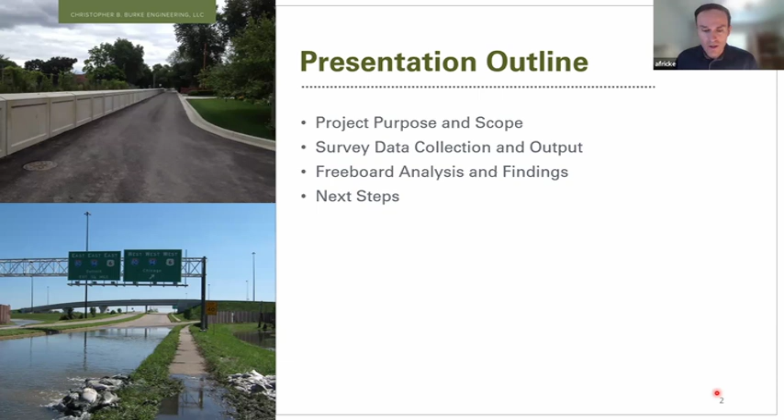First, I would like to discuss the purpose and scope of the project that we're doing for you. Then I will talk about the survey data collection and the information we gathered from that. Following that, I will get into the freeboard analysis and our findings, and then talk about the next steps where we go from here. So first, let's start with the project purpose and scope.

The purpose of our project was to evaluate the levee system freeboard, or the height of the levee, with respect to FEMA requirements. We also wanted to collect data that could be leveraged in the future to apply for a letter of map revision, or LOMR, or continuation of the previous LOMRs with FEMA. As a reminder, a LOMR is a process where FEMA revises the flood insurance rate maps to reflect the benefits of the levee.

It was mentioned earlier in the meeting that previous LOMR efforts that the Basin Commission has initiated have resulted in great benefits for the community west of Cline Avenue. Those communities are no longer subject to the mandatory flood insurance purchase requirements and development restrictions that they must enforce as a participant in the National Flood Insurance Program. The East Reach levees east of Cline Avenue have not received a letter of map revision despite past efforts, but there are ongoing efforts to try to achieve that.

The scope of our work included collecting and processing survey data for 30 plus miles of levee. I'll show you a map on the next slide of exactly where we were working within the system. Then we performed a freeboard evaluation, which was a comparison of the actual levee height to the required height. We've got some graphics to share tonight as well.

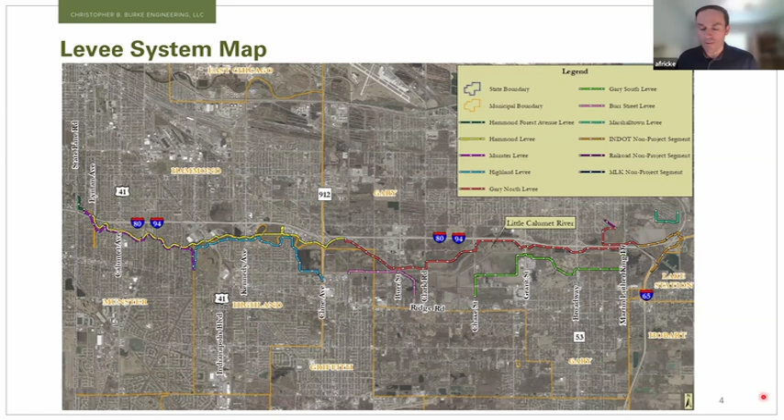Our survey data collection was performed using an unmanned aerial vehicle, or drone, with a LiDAR scanner mounted to it. It collected a dense cloud of points, a bunch of data, which we screened through and extracted elevations from at approximately 100-foot intervals, as well as areas of importance to us at road crossings, at transitions from levee to flood wall, and in other important areas.

The accuracy of our data was really, really good. With the drone, we can get accuracy up to about 1 inch, which is commensurate with and in line with ground survey accuracies as well. So we're able to collect very good data using the drone.

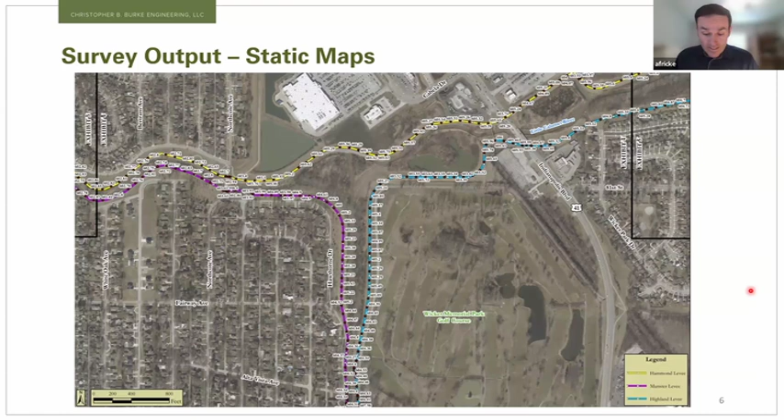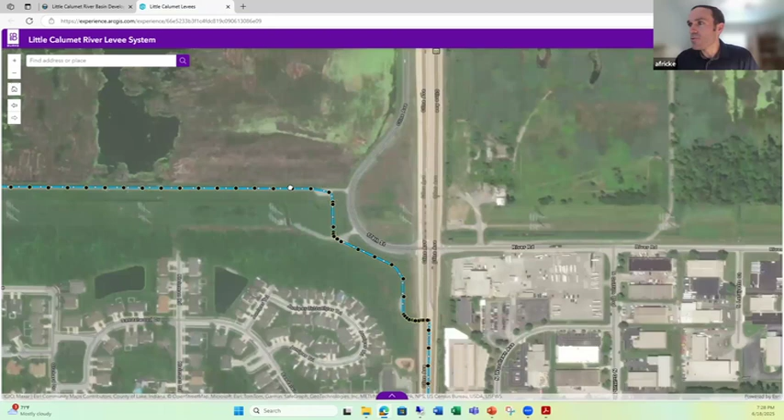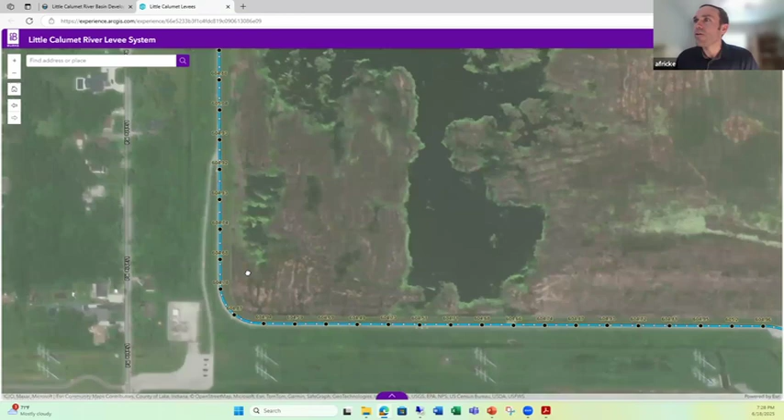I'm going to attempt here to show you our online platform. So this is the online platform, and you can zoom in to any location within the levee system. I've just chosen Cline Avenue as a starting point, but you can peruse and go anywhere in this levee system—scan, pan—and see what the elevation of the crest of the levee is anywhere within the system, all throughout the 30-plus miles from the Indiana-Illinois state line all the way to the interchange.

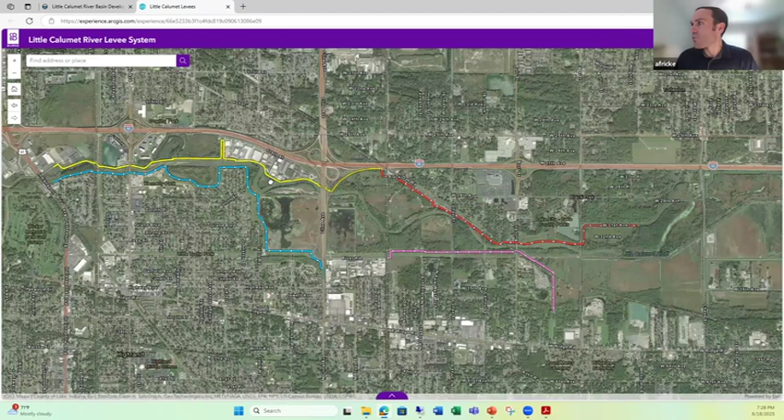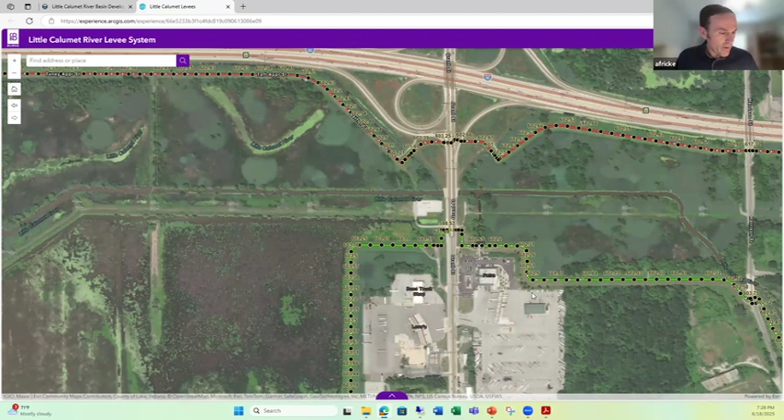I'll just peruse a couple other areas so you can see the amount of data available here. Obviously you have to zoom in to start seeing these points, but this is a very user-friendly platform that anyone with a computer and internet connection can use. We hope this platform is very valuable to you, not only for this assignment but also for the future, having all this data readily available.

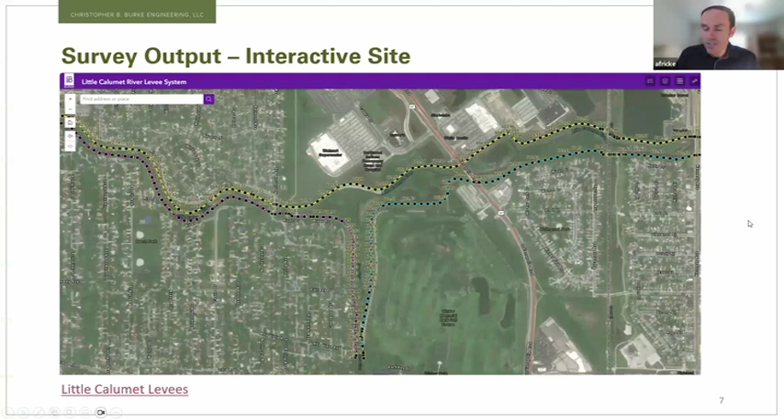Oh, is that cool? Okay, so I'm going to get to the next slide here, back in the presentation.

So we build in freeboard to levees in our designs to account for some of that uncertainty. When we look at the criteria that FEMA looks at for accrediting levees or recognizing them on the flood insurance rate maps, we have to look at the Code of Federal Regulations, specifically 44 CFR 65.10. That's the section of the Code of Federal Regulations that deals with floodplain mapping.

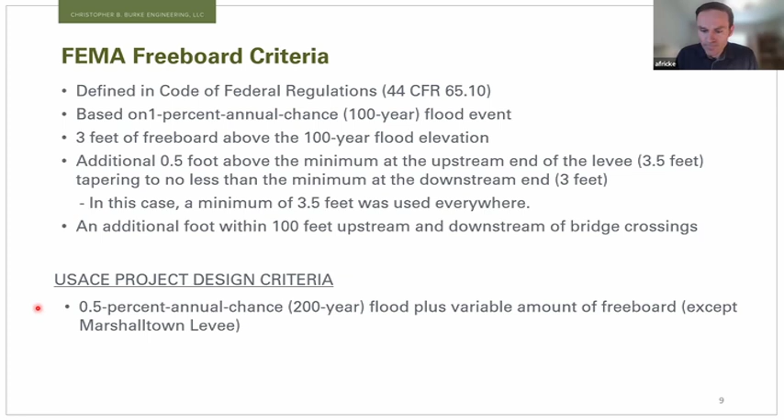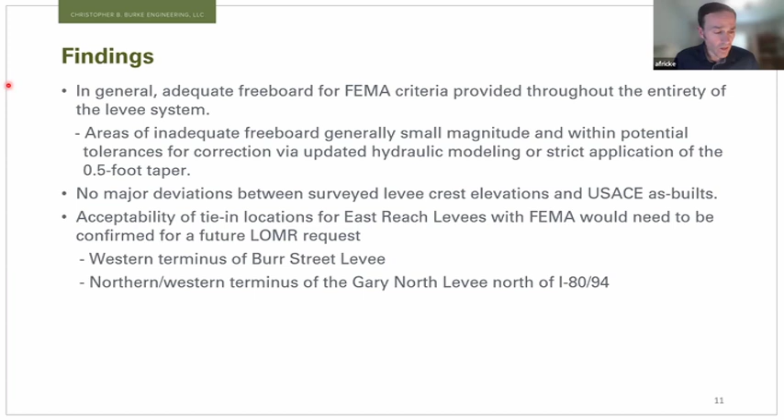I wanted to highlight the western terminus of the Burr Street levee and the northern western terminus of the Gary North levee north of I-80/94. Those are two areas that we'd want to look into in close detail as part of a future LOMR request, just to make sure that those meet all the requirements.

Next steps and conclusions here. This is my last slide, and I'll be glad to open it up to any questions. But we are currently authorized by the commission to perform a two-dimensional hydraulic analysis of Little Calumet River. This will serve as an update to the existing flood elevations. This model is expected to be more accurate than the current flood elevations.

So what we want to do when we're done with that work is to update those freeboard profiles for each levee segment using those new flood elevations. And based on that information, we'll then provide specific recommendations for any improvements that need to be made to address any freeboard deficiencies for the FEMA requirements.

So we're hopeful that the new flood elevations will be at or below the current flood elevations. We're keeping our fingers crossed for that. That would certainly be a good sign, but we'll cross those bridges when they come, and we'll update those profiles when we get there. But overall, good news that the levee system meets the height requirements for FEMA for the vast majority of the system.

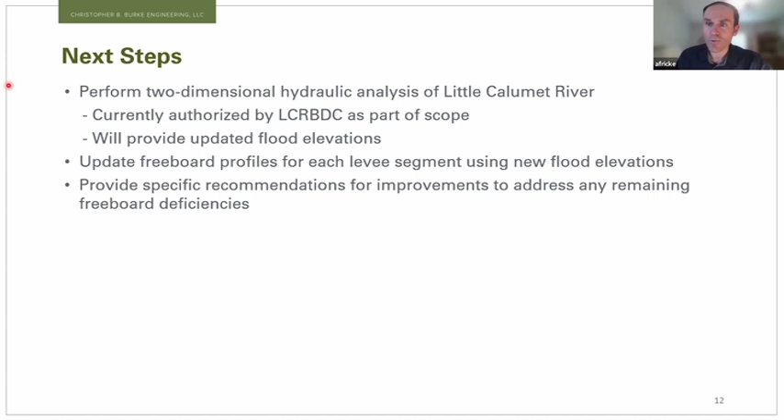So I'm at the end of the presentation now, and would be glad to answer any questions that you might have.

Gentlemen, any questions for this young man? That was a fabulous overview. Thank you very much. Concur, Mr. Chairman, I do have some questions. Thank you. AJ, right? Yes, sir. Okay, good. I have like 4 or 5 questions.

Be glad to answer. First 3 are sort of administrative. One of the first slides you implied a difference between a LOMR and a continuation of an existing LOMR. What's the significance of that?

That's a really good question, and one that really doesn't have a clear answer out there, but I'll try to answer as best as I can. So for projects that have an existing letter of map revision, like the levees that are west of Klein Avenue, we are not familiar with a process whereby FEMA goes back and reevaluates those at a certain time interval to check that they're still meeting all the requirements. In our experience, once you have a letter of map revision, that is in effect indefinitely.

So until you fail or something, right? Yeah, until there's something that would prompt a change. There may be a change in how FEMA views that in the future, but in our experience, there's been no going back and rechecking or reevaluating a letter of map revision unless something prompts that.

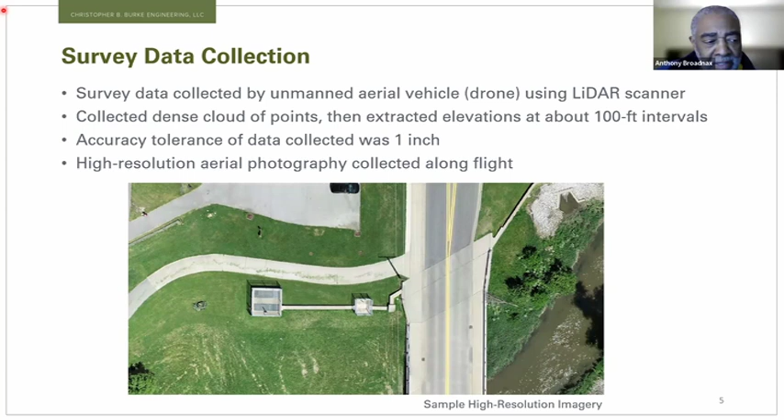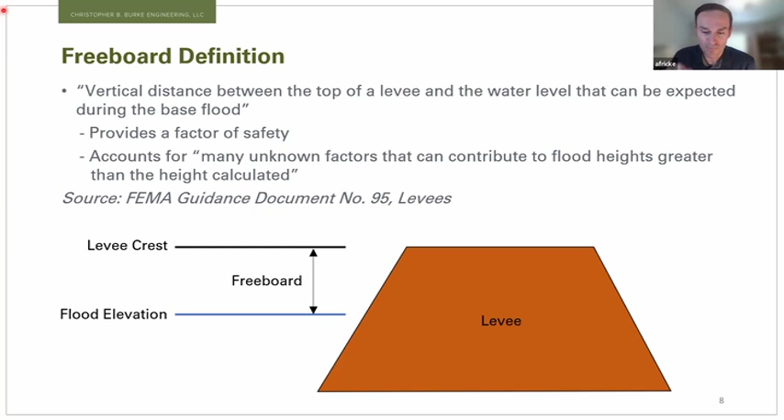Yeah, that's a really good question, and I'd like to clarify that we not only included the earthen levees in this, but also the flood walls. So that was one of the areas where we really had to sift through the data, because the levee crest on an earthen levee is much wider than the narrow top of the flood wall. But we indeed were able to get the top of flood wall elevations as we went along, and you do see those ups and downs.

Okay, very good, really good question. And then the last one - you mentioned a couple times about transmitting the information to us or others. And I forget sometimes we're public, but when I hear that...

Wait a minute, this is our data - who else would you be communicating this information to? Is that a general acknowledgement that we may want to share it, or is there a plan to share it with somebody else? It's just a general acknowledgement that if you want to share it with others, you have the ability to do that with the link we provided. It's not a private connection - we haven't sent it to anyone else other than you, but you can share that with others if you so desire.

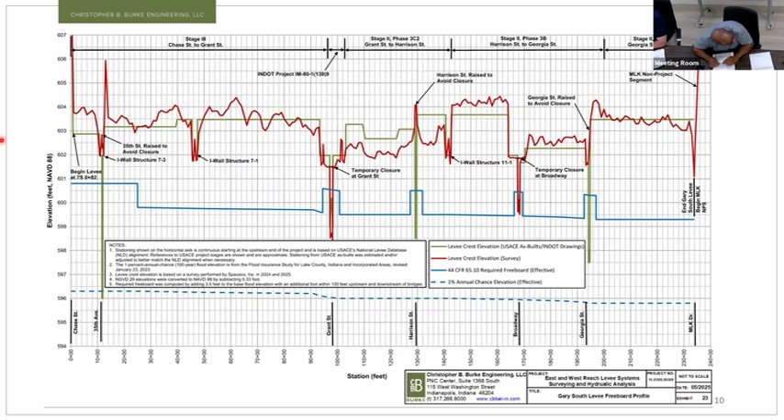Great presentation, by the way. When you guys start your borings, what do you plan on doing with the material that you bore and drill?

A geotechnical investigation is planned for the levee. We're still working out details with the U.S. Army Corps regarding the Section 408 permit. The exact plans for disposal of those materials is still to be determined, but we'll probably need to find a location near the levee to dispose of those cuttings. Yes, we need permit approval to commence the work.

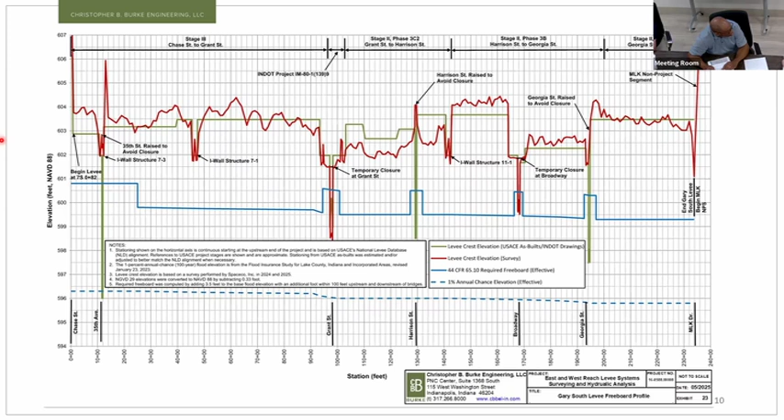For the green lines and the anomalies at 35th, what do you guys attribute that to? 35th Avenue is interesting - that's one of the locations where the Basin Commission came in after the federal project and raised the road profile in that area. That's why there's such a huge anomaly from the green line to the red line, because there was a project initiated after the green line plans, so we're not seeing as much correlation there.

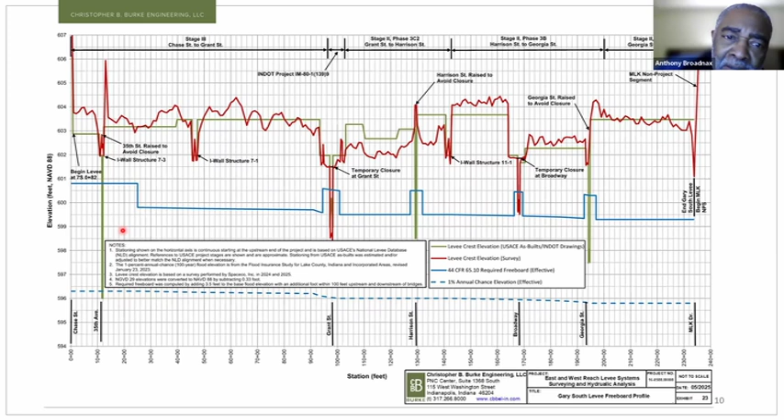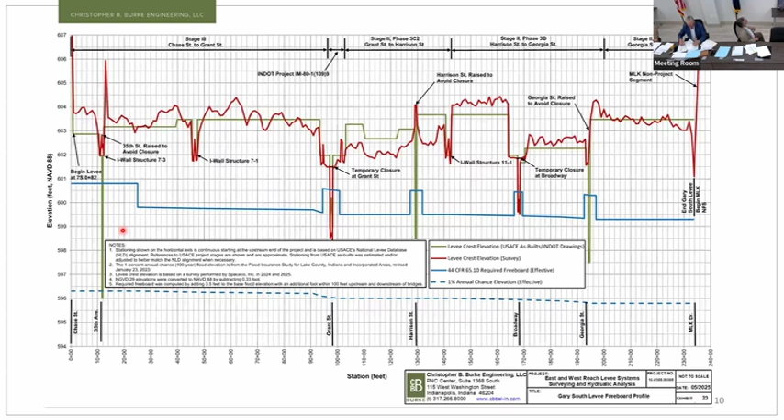Is that where the Corps was basically planning for 35th as a 2-flood closure as part of the project? No, 35th had panels stored in the old fruit shop, and we built over it - same for Harrison, where we rebuilt the bridge. Those were all closure structures where we had to put the 33,000 sandbags. So when we raised Georgia and Harrison at 35th with the panels, that's why the as-built shows so low, and the red line where they flew it over shows where it is now. The only closures in Gary now would be Grant and Broadway.

And I don't think that shows up here, does it? Yeah, here you go - you can see we're showing those temporary closures at Grant, and Broadway is also over here. Georgia and Harrison are very similar to 35th, with big spikes in the green line, but the Little Calumet Basin Commission has initiated projects there since the as-builts were created.

Touching on what Commissioner Whitaker was asking - when you do the borings, while you're still going through approvals from the Corps, are you going to inject those holes with slurry or some cementitious material after taking the boring? Yes, those borings will likely be backfilled with bentonite material, bentonite grout or bentonite chips. We're still ironing out the details, but that's typically the backfill used in these types of applications.

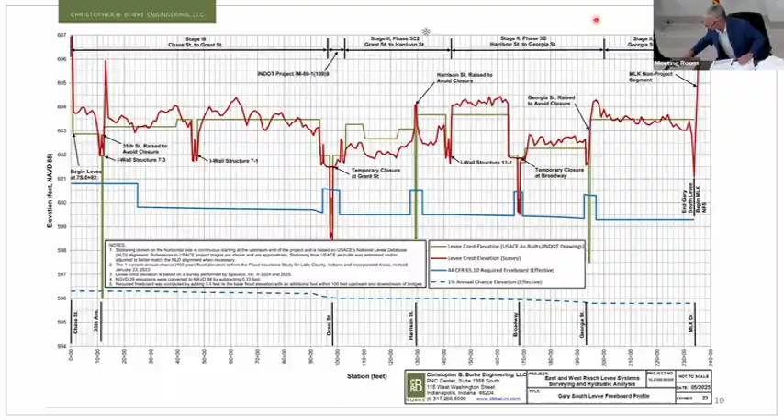Moving right along, next up is other issues, new business. Mr. Chairman, I'd like to make a motion to approve resolution 2025-13 and the Fifth Amendment to the Leaf Compost Agreement with the Lake County Solid Waste Management District, subject to legal review. There's a motion.

Is there a second? Second. Mr. Repay, how long have we been doing this? Well, this is the Fifth Amendment. I think we've been doing it for about 8 years, because I think the first couple we did, we had 2-year agreements on them. This is right at 35th and Chase, right behind the old fruit market. It's adjacent to that school over there, the firing range over there, across the street from Maya. Any questions on this? Get a motion and a second.

I think the motion says addendum. We said amendment. I don't think that really matters though, does it? Attorney Nicole, we don't need to redo it or anything, right? Are you asking? I stated amendment. I think it's addendum. It's not material, but I just wanted to throw it out. Let me clarify, Fifth Addendum. Roger, thank you, Anthony. Ms. Bennett, do I have to worry about Robert's Rules on this? Have to worry about what, I'm sorry? Robert's Rule, right? Who gets to make the rules regarding the addendum or the amendment language? His motion. No, that's fine. There's a motion and a second still.

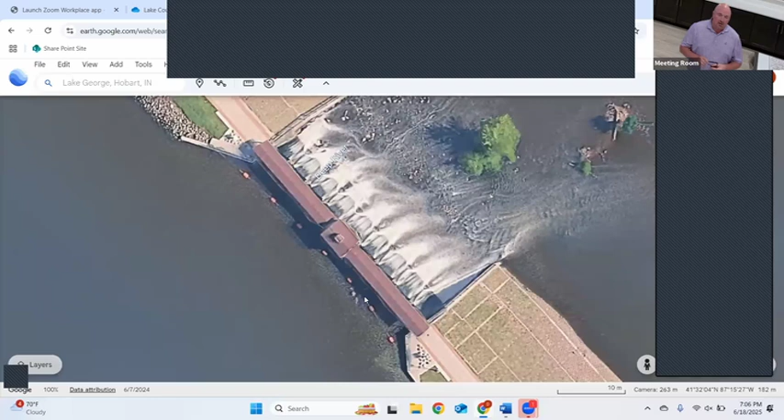Just talking with Hobart and discussing, the recommendation is for SEH and DLZ to give us what you're approving now, which is to give us a couple options as to what the new look could be, understanding the hydraulics of it and helping water flow through there. As we all know, Deep River controls what little happens in Little Cal. So if we can get the water through there quicker in an efficient way without impacting anyone downstream, not flooding Hobart downtown like that had happened in the past, even the trailway in downtown Hobart flooded, I believe in '18. So what you're doing now is allowing DLZ SEH to proceed with some options for us to choose from, with help from our city, Hobart.

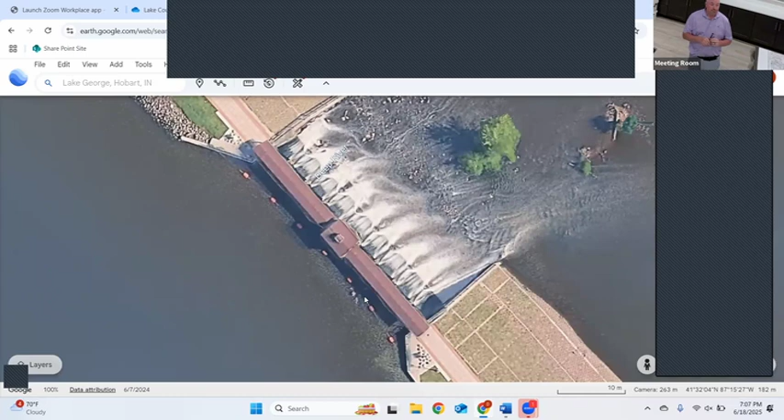I have a question. So who controls the flow and opens those gates? Is it Public Works at the city of Hobart? Yes, but we modeled that, and opening that gate has no bearing. It's so small that it's insignificant - it would take days for you to open that gate to drop down the level of the lake itself.

So the new engineering is not gonna necessarily have all of those gates - what are we calling them, float gates? No, it's all gonna be naturally done. Similar to Lake Station at the Rock River - if the water goes up, more water can get through the system. It can be easily maintained, so we're not out there putting people out in front of this dam. That's the goal.

All right, we're just doing engineering. Yes, Ms. Bennett.

Because this is a new item to the agenda, you do need to ask for any public comment on this. Is there any public comment on it? If there is, please come to the podium, state your name and address for the record. 155 grand doing preliminary engineering. Going once, going twice, closing that.

Any other questions? Mr. Chairman, I have a question. Mr. Repay, quick one - do you have an estimated time frame for two things: one, the preliminary engineering, and then if there's a subsequent detailed design, and then ultimately when it would be constructed? Are we three years, two years? It's gonna take roughly 6 months, assuming we get an agreement together that's acceptable to our attorney and everyone here. So end of this year, okay.